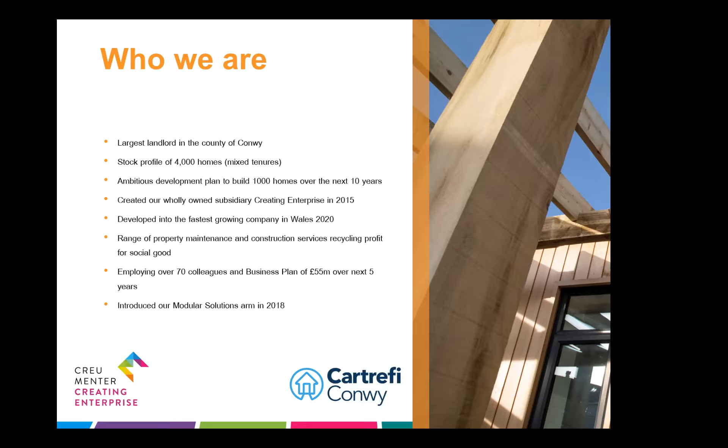Just a little bit about who we are. For those of you who have not heard of Cartrefi or Creating Enterprise, we are the largest landlord in the county of Conwy. We have a stock profile of circa 4,000 homes, mixed tenure, and we have a very ambitious development plan.

As do many social landlords now across Wales, we aim to build about 1,000 homes over the next 10 years. Creating Enterprise is the wholly owned subsidiary of Cartrefi, and it's been a huge success to date. We created the company in 2015, and we're very proud to state that just last year, through the Fast Growth 50 Awards, we're officially now the fastest growing company out of any sector in the whole of Wales, providing a range of property maintenance and construction services.

Not just to Cartrefi Conwy, but to various other sectors, recycling the surpluses we make for social good. The social good we really emphasize and try to drive forward is creating work opportunities for those furthest from the job market. We're now employing over 70 colleagues within the business, with an order book of over £55 million worth of work just over the next 5 years.

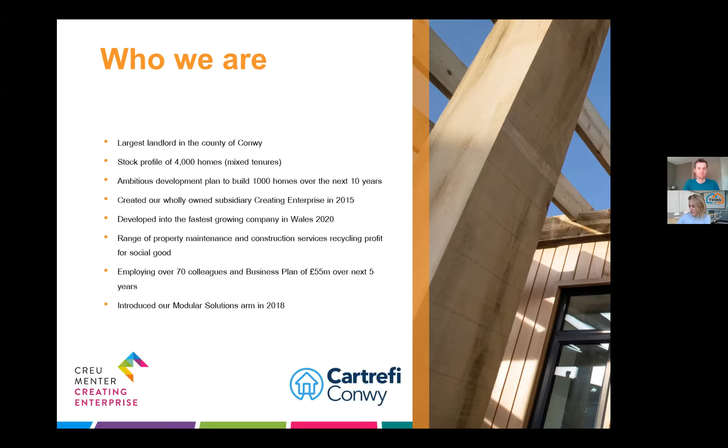And we introduced our modular solutions arm in 2018, which I want to discuss and present to you today. So Creating Enterprise Modular Solutions, what is this?

In effect, it's a partnership agreement we have with Beattie Passive Build System. We have the exclusive license to build this system across North Wales. So we have bought into a license, but the whole purpose is a self-build model. We employ local labour. We've upskilled our own colleagues within Cartrefi Conwy Creating Enterprise, but also give opportunities for tenants to come into the business on paid employment to build these homes moving forward.

So in effect, why did we build this product? Well, it is within Welsh Government's ambitions to build zero carbon homes, exactly what this product gives us. But it's also Cartrefi Conwy's aim to not only build quality homes which are cheap to run thereafter for our tenants, but also to utilise tenants to build these homes. That is our vision, and that's what we are already achieving and want to continue to strive forward to achieve over the coming years.

So, real super energy efficient homes, reducing costs, very healthy homes to live in, and what we do like about the product as well, we do see these as real lifetime homes. There's no load bearing walls within the home, so in terms of development quality requirements or homes that can be fully adaptable moving forward, we've got the solution here.

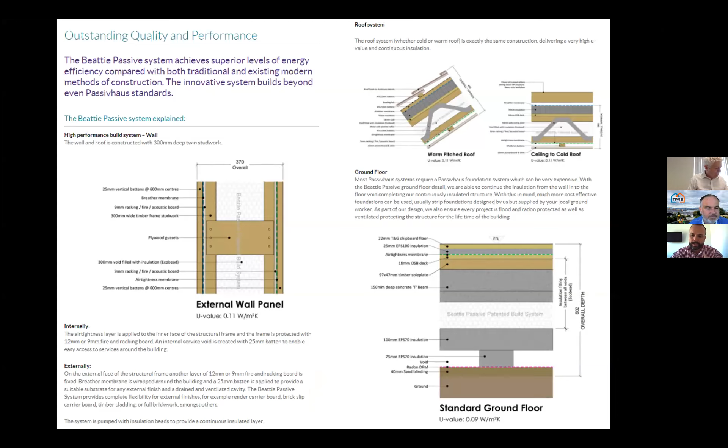I've got a couple of slides here which I'm not going to go through in all the detail, but if anyone wants a copy of this presentation thereafter, I know it'll be widely available. What I have put in is some of the technical aspects of the build, which is all here in black and white, but really my focus today is just to give a general overview of Creating Enterprise and why we're building this property, who we're trying to house within this property, and the fact that it really is aimed at our tenants of Cartrefi Conwy to not only build the product, but then to live very comfortably in these properties thereafter.

So these are part of the presentation pack. As I said, I'm not going to go through it all in detail, but it's there for anyone who wishes to see the technical specifications thereafter.

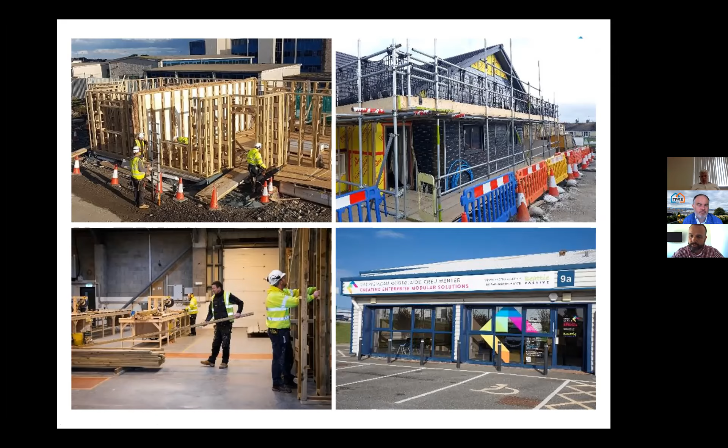Our factory for the first 18 months was based in Anglesey, in Holyhead. On the bottom right here you can see the unit we were working from. We're actually going to be relocating more to central North Wales in the coming weeks, operating out of Rhyl but also serving the whole North Wales community. In essence, it's a timber frame product built to passive house standard, a very high energy efficient standard in house building.

Another scheme we've recently completed, with a short video clip I'd like to share, is the Sefton Road scheme in Old Colwyn. This is a scheme developed alongside our local authority, Conwy County Borough Council, developing 8 one-bed units for homeless accommodation. This has now been completed, and all residents and tenants are living in these units - it's been a huge success. This was an old garage site which we knocked down and built these 8 units for much-needed accommodation in the Old Colwyn area.

I'd like to now, if it all works - and here we go. This is the 'never mind building homes' moment, I think this is the hard bit, getting a video to work. It's only 3 minutes long, bear with me for the first 10-15 seconds. The sound's not great, but I can assure you it does kick in.

This video explains, from our lead trade Bryn Jones who looks after our modular team, the background of this project. It was filmed at the back end of last year, showing the property being built, and I'm pleased to say these are now all built and we've got tenants living in them. I'm just going to share this now with you all.

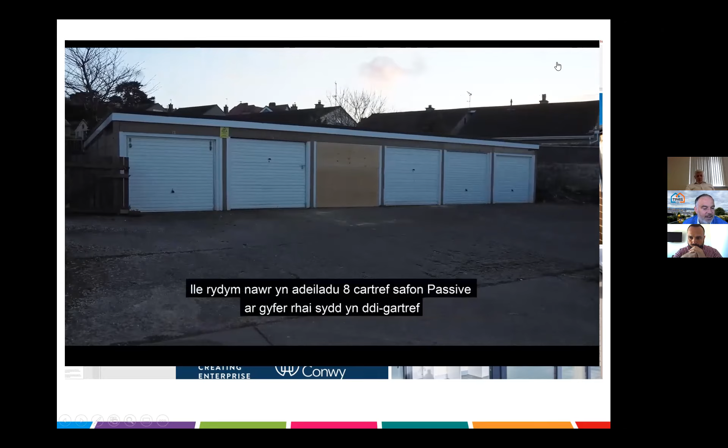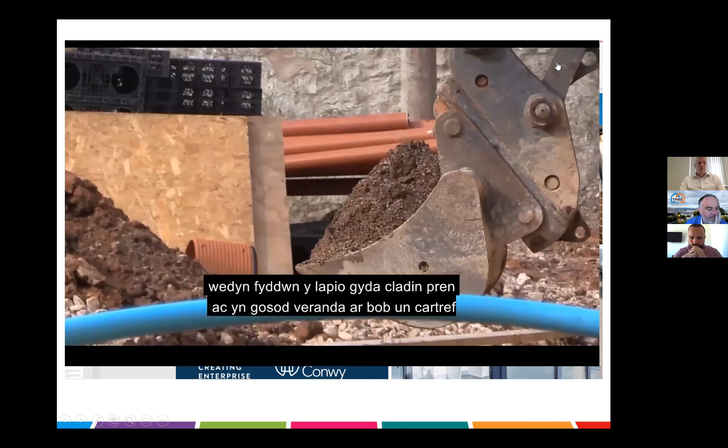Hi, I'm Bryn Jones, Lead Trade Technician for Creating Enterprise Modular Solutions. Here we are at Sefton Road, Old Colwyn, where it used to be an old garage site, and we're now building 8 passive standard homes for the homeless. As you can see, this is work in progress, due to complete in November this year. We're currently completing utilities and groundworks outside, then we'll be wrapping the home in timber cladding and building verandas on the front of each home.

The benefits of living in one of these Beattie Passive homes is the energy efficiency. This home will cost about £40 a year to heat, with triple glazed, airtight windows, 0.11 value in the wall and 0.09 in the floor. That gives you a house that heats for about £40 a year.

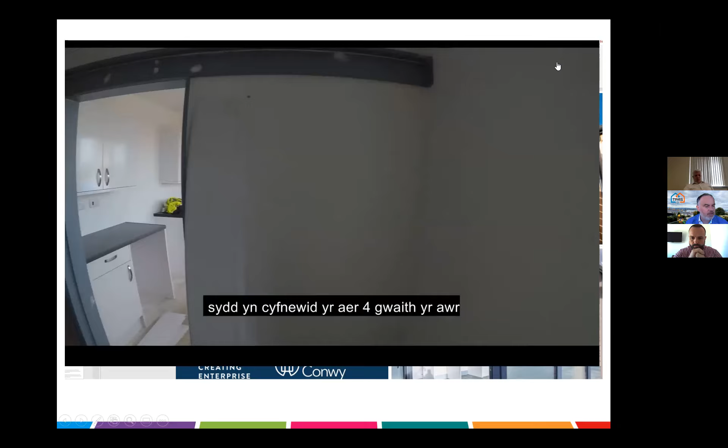It comes with an MVHR system in the cupboard which exchanges the air 4 times an hour, puts the air through 3 filters - dust, pollen and pollution - giving a clean air environment to live in. It helps people with respiratory illnesses and asthma.

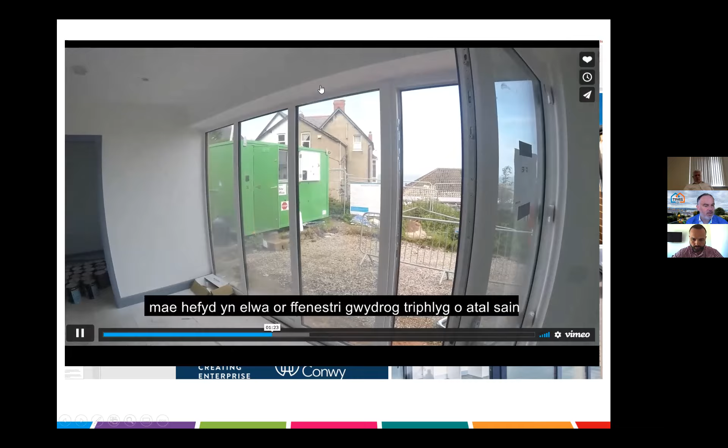It also comes with the benefits of triple glazing for sound deadening, so what you hear outside does not come inside, giving you a nice quiet area to live in. Even if you're next to a busy road or train station, the noise does not travel in through the walls.

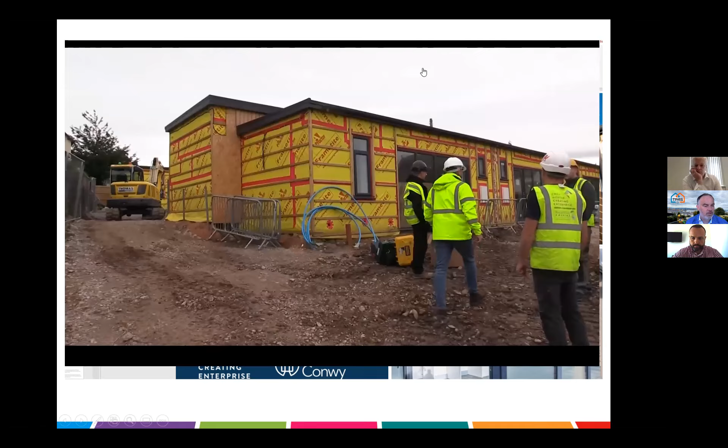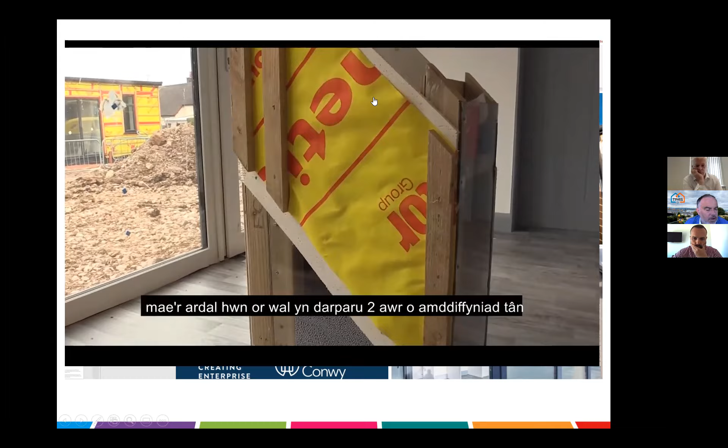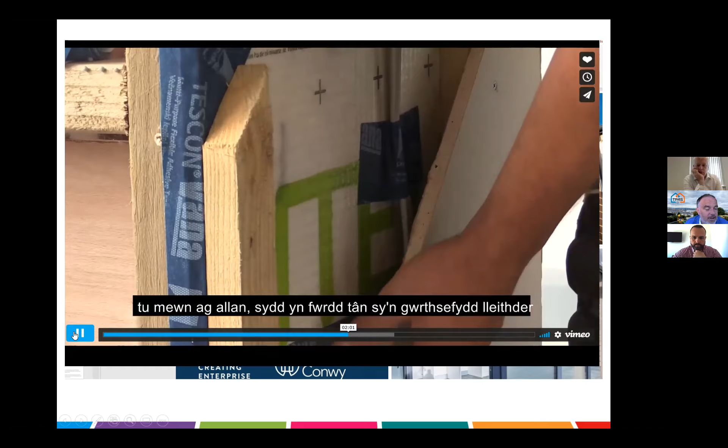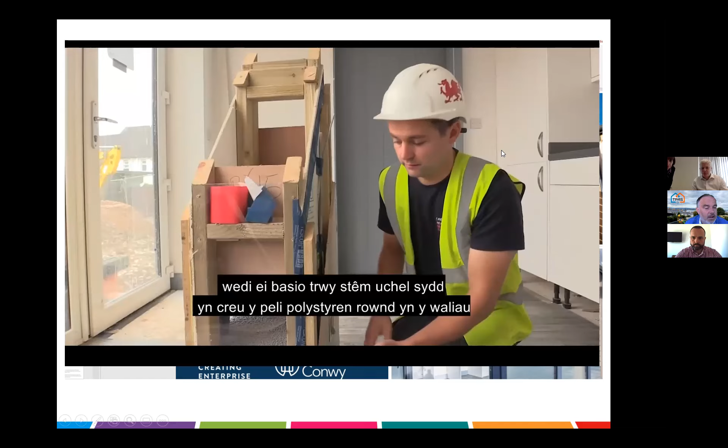This is gained by using white wall boards inside and outside, which is a moisture resistant fireboard. Once the boards are on internally and externally, we then drill holes and pump in the EcoBead, a high energy efficiency material created from old oil passed through high steam, which creates the polystyrene balls that we inject into the walls.

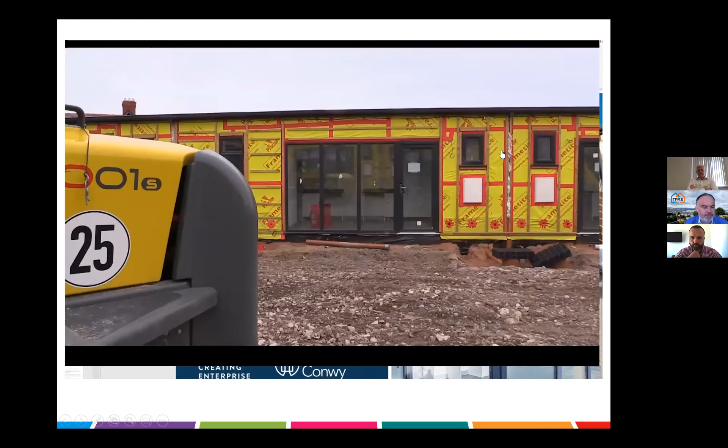As you can see, it's a very spacious 1-bedroom home with a bathroom behind me, a very spacious kitchen, and a very spacious bedroom behind you there.

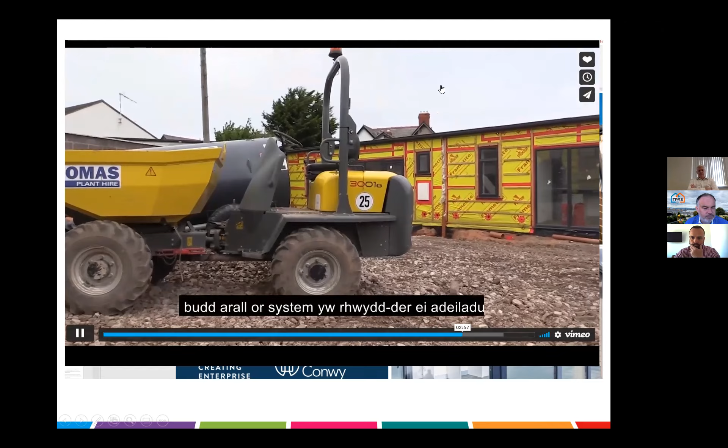Another benefit of the system is the ease of construction. We give an opportunity to local unemployed people to come in and gain life experience and work experience erecting these properties. We are currently employing 4 trainees from the Anglesey area where we've been building other houses, and it opens an opportunity for any people from any area who are unemployed to gain the life skills required, and hopefully one day become part of our team.

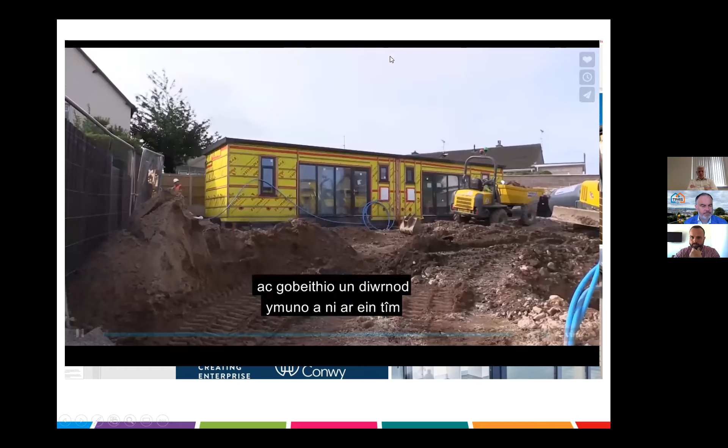Okay, thank you. Hopefully you're able to hear that. Okay, so here we go, push it. How I get out of this now, I do not know. Can you hear me, David, again? Yep, I can hear you fine. You need to just stop sharing, that's all. Yeah, okay.

Thank you. So yeah, I'm pleased to say, from the 4 trainees we had there, we've now employed one of them full time into the business, which is great news for us and great news for that previously unemployed tenant, who is now working within the team and an integral part of it, where we've got a large order book building these homes moving forward.

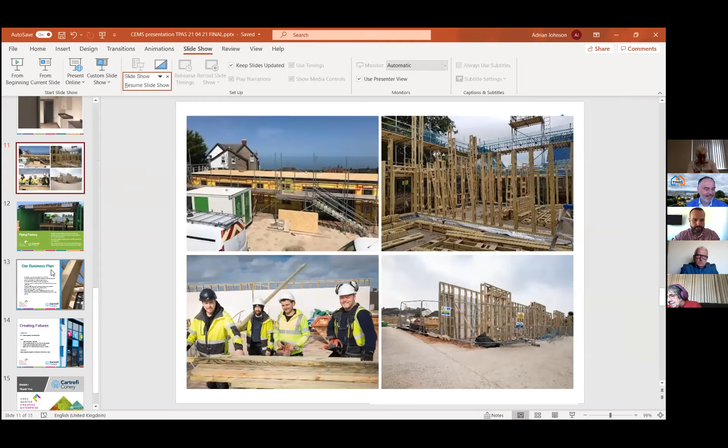So I'm just coming to the end of the presentation now. Just bear with me. I just want to end really on the business plan itself. It keeps wanting to go back to this video. Apologies, I'll have to just talk you through this. I don't know why it's going back to that one.

Apologies for that. But the business plan moving forward is predicated on employing local people and being able to sell this product to the North Wales market, to housing associations, local authorities and private developers as well. We're pleased to say we've already built 25 of these homes, with the intention and an order book in place to build another 100 homes this year. We have a business plan provision to build 350 of these homes over the next 5 years. So not just building these quality homes for people in need, but also the amount of jobs we can create in the near future. I think it's quite an exciting opportunity, not just for us, but for tenants of Cartrefi Conwy as well.

So I'm conscious of time, I could go on a long time about this. I'm quite passionate about it, and I think it's something we're very proud of. It's great that we've got our board member Bill Hunt here today, casting an eye over myself and being able to really promote this from TPAS perspective as well. I think it's fantastic. And from that perspective, David, Elizabeth, I'll conclude my presentation. Apologies why it wouldn't go back. I'm not the best on IT at times, but I'll conclude the presentation and take any questions.

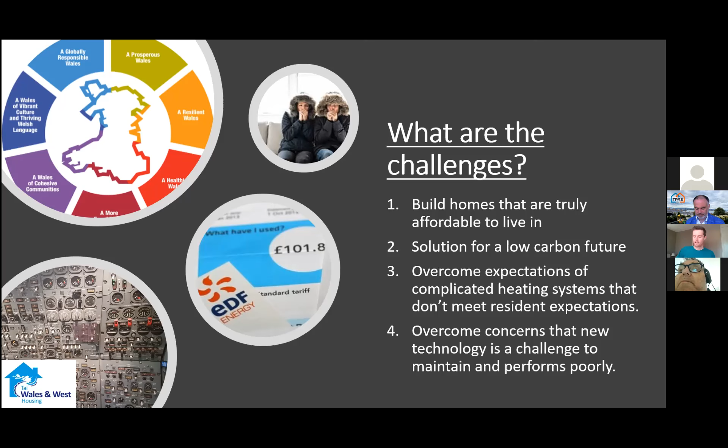Why do we like it? To be more specific, there was lots of PV on the roof, providing lots of free electricity generation that residents can use. But also putting in a battery system - a large battery that can take that free energy from the roof and put it into the house so residents can use it whenever they want, not just when the sun is shining. So it's really handy to bring down those fuel bills and electricity bills, and it's also good for the environment.

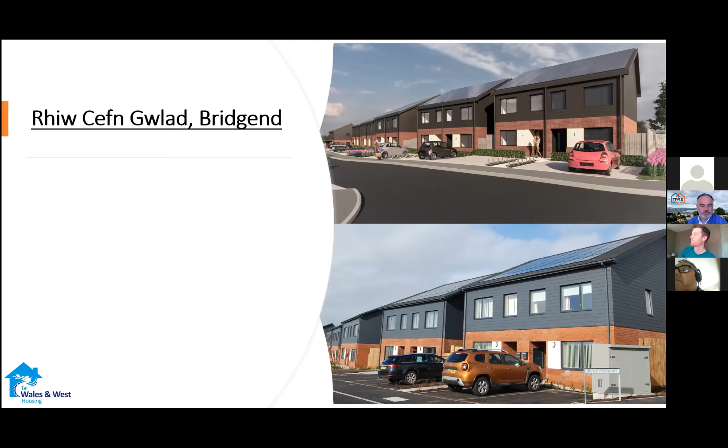I'll come onto more of the detail just later. But I'll run through - so these, we built 4 one-bedroom flats here.

We did this with a range of different types of property, just so we could get an idea of exactly what suits the needs of the local authority, but also to push that concept to make sure we can do this across a number of different housing types. So the flats we've got are well proportioned - they're 52 square meters, which is higher than our usual minimum standard.

I think Cadogan's gonna kill me on this. Cadogan's here - hi Cadogan. I think it's 48, 45 square meters for a 1-bed flat. He can tell us later - he's better at this job than I am.

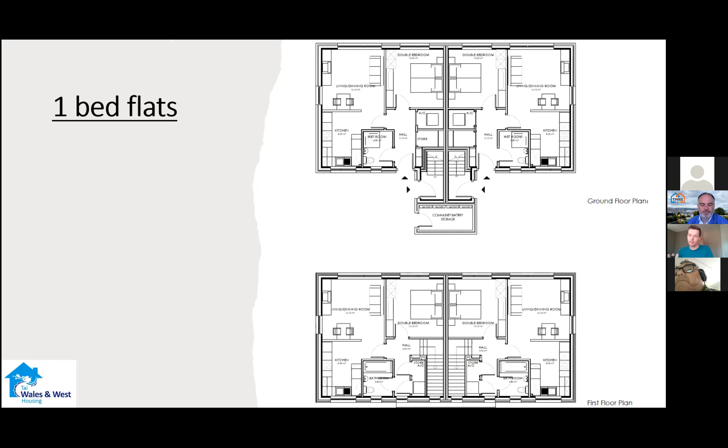So it was a bit larger, and the reason for that was the heating system we're using - it's not just a boiler on the wall, this thing's the size of a fridge freezer. It's quite large, so we need to get around it and find a store for it. It's actually increased the square meterage a little bit as a result, by about 10%, which has increased our total construction costs. But again, something for discussion.

We got some 2-beds - we built 8 two-bedroom houses here. Again, well proportioned, we've been thinking about the residents. These ones are 89 square meters - larger again to allow for the battery storage for the heating system.

On these, we've come up with a way of allowing an easier conversion of the loft. We know people want to stay in these properties, join a community and stay in a community, not have to move because their family size increases. So within these properties we've created a warm roof, which means we can convert the loft much more cost effectively than normal, so these can be converted into a 3-bedroom should they be needed in the future. We might come onto that later.

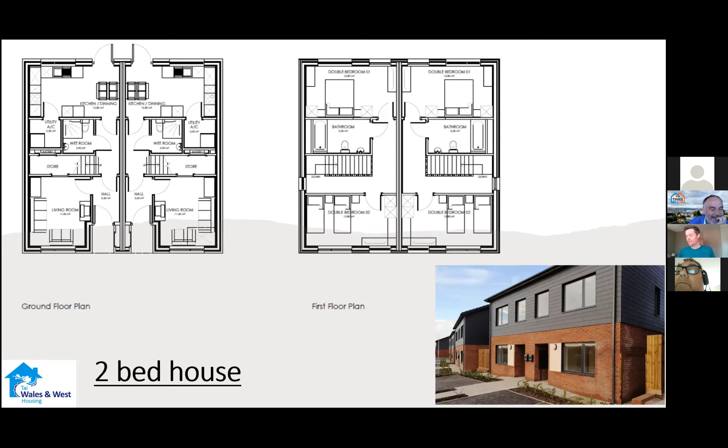4 beds - we didn't build any 3 beds, we built 2 four-beds, and these are 120 square meters. So again, suitable for families, suitable for multiple particular needs. All of these are lifetime home standards - they've all got ground floor wet rooms and a first floor bathroom. So very light and well sized for a modern family.

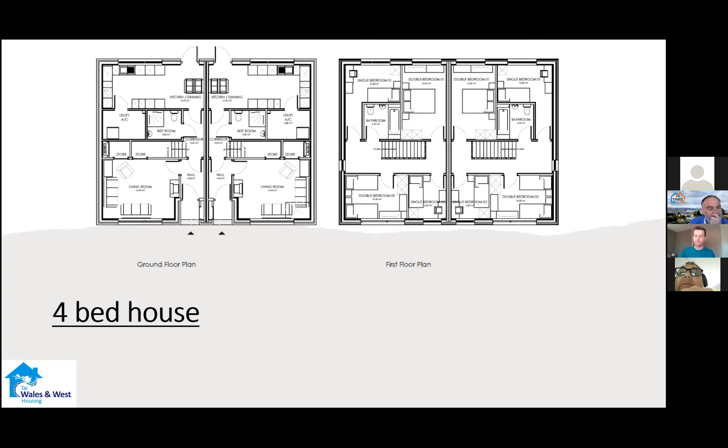So those challenges I was talking about - the first one was about making sure they're truly affordable. So energy bills - how are we cutting down energy bills? Like I said, we're reducing energy demands by making it super insulated and really airtight. We were talking about passive standards in the last slideshow, and we didn't meet those - they're really, really tough to meet. We tried to get there, but we couldn't.

So the minimum building regulations state you have to have a quantity of, let's call it, 10 air changes an hour for a property. To get good practice is 5. To get passive standards, it's 0.6. We managed to get below 2 on these ones - just to put it in context. So air quality is really important - if you start getting to below those standards, you have to be putting in mechanical ventilation to keep that airflow going, because otherwise you end up with pollutants and a poor environment internally.

And that's part of our heating system - it's actually taking the air from hotter areas, recycling it and putting it into other areas. On this scheme we've got no radiators - we've got a blown air heating system that recycles that warm air, using an air source heat pump solution - so an air-to-air solution. Some air source heat pumps you've previously seen have probably had radiators or underfloor heating where it's gone from air to water, converting energy from air into water that then circulates around. So this is air-to-air.

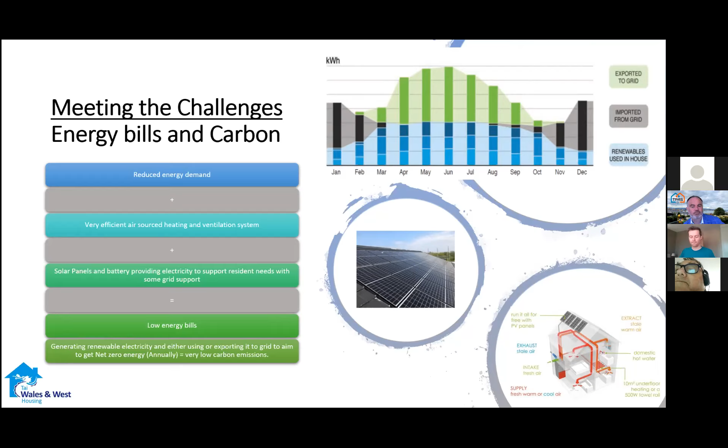They're easy to use - the properties are really easy to use, and it's really important that we do that. We've provided user manuals, how-to-use guides, and video guides, all on our website. The control panels we used are really simple, and they're adjustable for the residents' demands. We'll come on to that later.

The technology we put in ensures we can remotely monitor, so our maintenance teams can check to see whether things are working as they should remotely, without having to wait on a call from a resident. This means we can keep an eye on the heating systems and everything without calls coming through that then become an emergency to fix. I think that's a great system we've got there. During the design and construction phases, we made sure we engaged with our maintenance teams so they learned as we went how these were built, especially the heating systems.

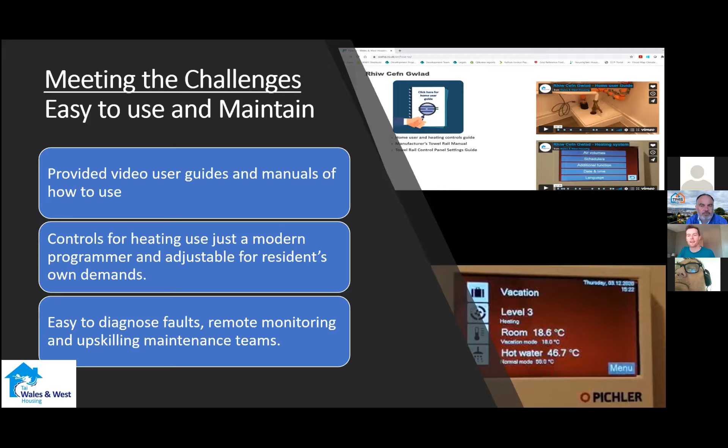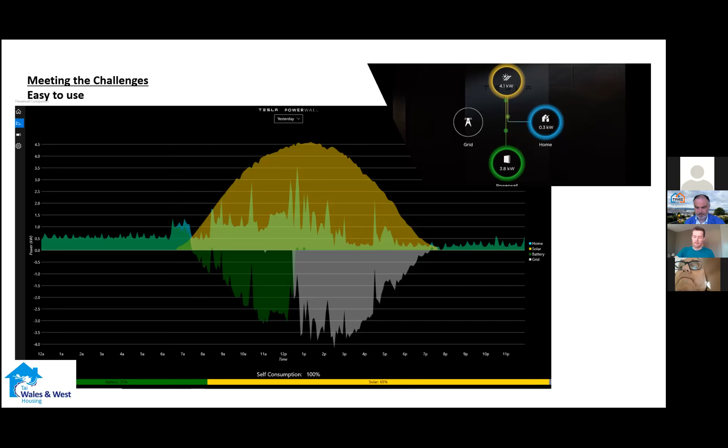So the next steps. We started in 2019, we completed in January 2021, so we're three or four months into this now. We're continuing to monitor these over the next year at least to see how they're performing, talking to residents as we will in a minute.

We have the technology, we have the capabilities of doing this. It's just what we do in the future and how we fund it without the IHP funding that we had before. I suppose that's the only query.

So my total build cost for this scheme, we're very open with what we've got here. It's 3.4 million for 14 properties. It was £2,900 a square metre. Usually we build things for around £1,800 to £2,000 a square metre. The total cost for innovation for the properties roughly was about £60,000 to £70,000 a property. So just to put that in perspective, I don't care about money, but sometimes you have to worry about money.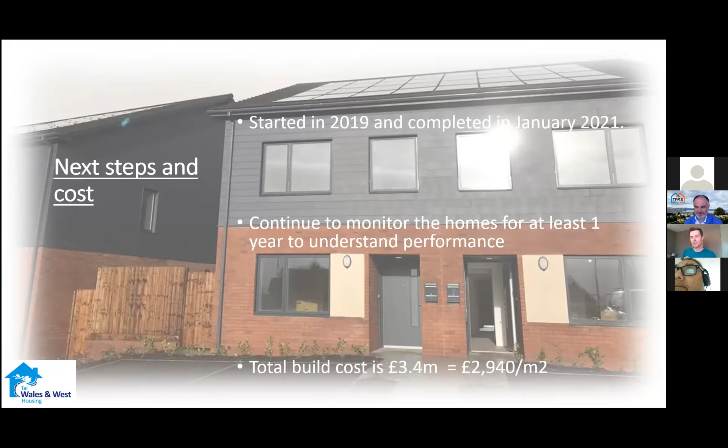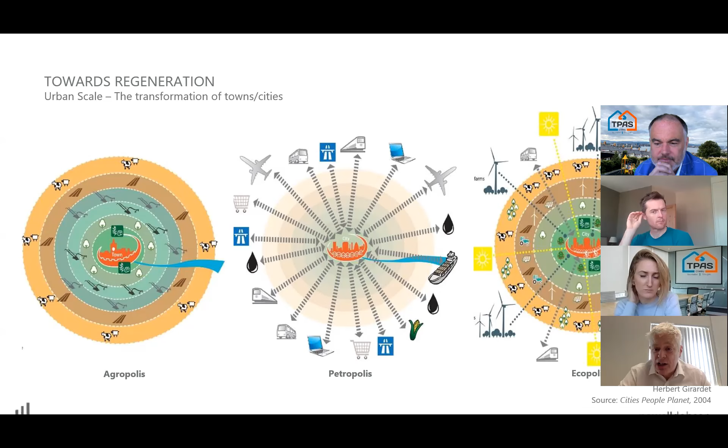There are issues we're going to have to address on transportation, planes and what have you. These are significant challenges, and one hopes that those sectors are taking it seriously and are going to look into transportation. To my mind, that's probably the biggest challenge we face, because there's a lot of technology there for homes and heating, and I think we need to step it up. But transportation is probably the challenge that perplexes me more than most.

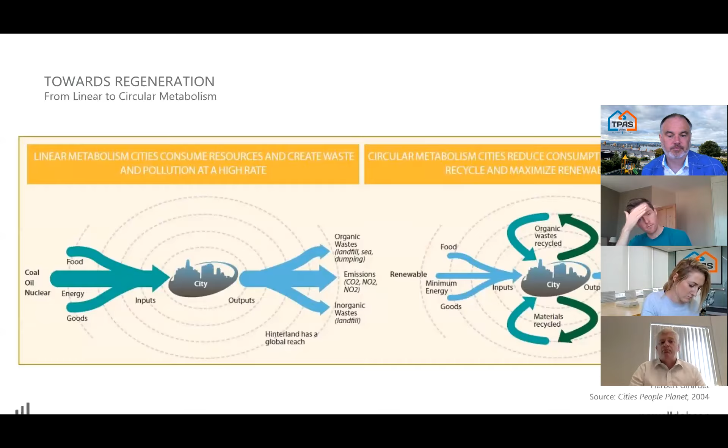So if we go to the next slide, it shows how cities are now. To the left, you'll see resource coming in, food, energy, goods coming into the city, and the outputs seemingly leave. That's pretty much the model we have at present.

So we have organic waste going to landfill, sea dumping, etc. We've got the emissions, we've got inorganic waste to landfill, etc. This can go a long way away from the source of generation, and it creates significant issues. We have begun addressing it, but we've got a long way to go.

The perfect scenario is the one on the right of the image, which shows these renewable energy sources coming in, food coming in, goods coming in, which are then recirculated and reutilized.

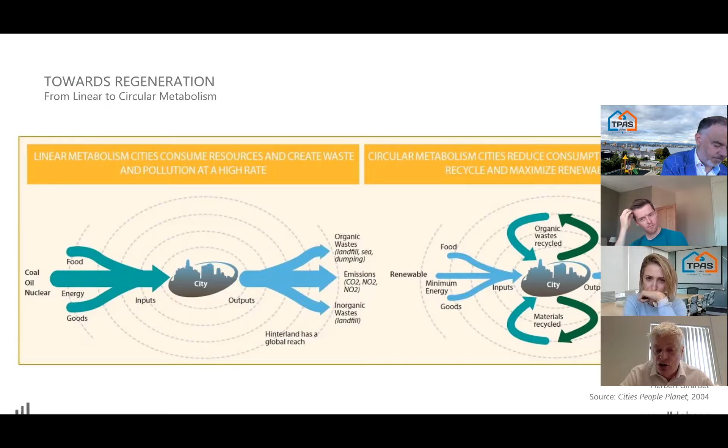There are many technologies. I'm particularly interested at present in the field of biodigestion and anaerobic digestion. I think that's got a big role to play, and we need to investigate it on a far higher level. By reutilizing waste, it removes the amount we put into landfill, the amount of pollution, etc. It is possible. There are technologies out there which have been used in certain contexts that we don't always appreciate, which can be used for human context on a more human scale and level.

So there's still movement of waste to outside of those environments. That needs to be further worked upon, but that has to be the aspiration. We've got to remove this constant throughput of in, out, and somebody else's problem.

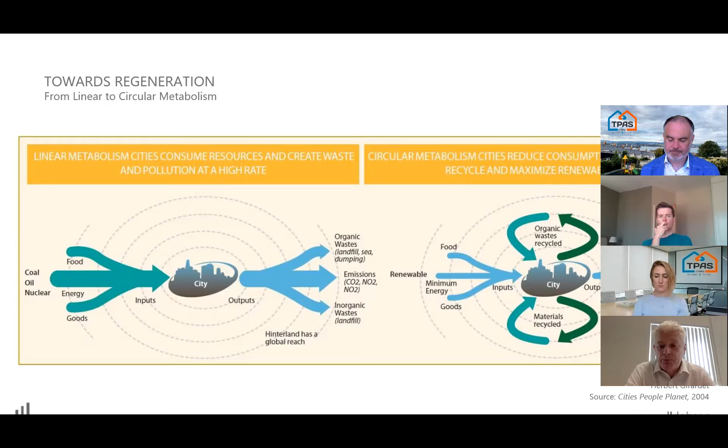I've spoken a lot about that, I know. So, okay, so next one.

Okay, and this is Biophilic Swansea. This is the scheme. As you can see, it involves a roof garden and roofscape with 50 residential apartments. We're working very closely with Pobl, Wales' largest social housing provider, in providing affordable homes and shared ownership homes. The ambition is to get people into the scheme who have an interest in this kind of way of living in this sort of context.

You can see to the rear there's a large 13-story tower. The building also shares use with commercial floor space, which is office use, so there's 40,000 square feet of office, and that balance will become more evident as the presentation moves on. We've got a small amount of retail on the ground floor, and to the rear of the tower we've got an exhibition and education space, which I think is really important, where we can display how this building works.

There will be a lot of display systems showing the energy use of the building as a whole. We'll also integrate an aquaponics system, which is probably a first in a residential scheme. Aquaponics, where we grow fish, which then provide the nutrients for growing plants and foodstuffs in the glass houses.

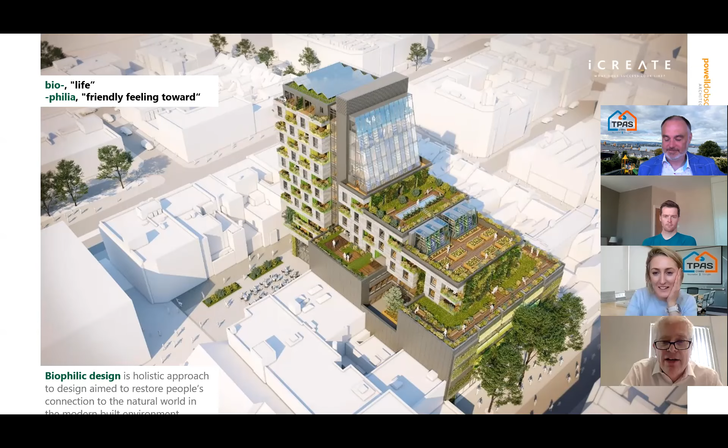So if we move on. Okay, so creation of a sustainable community. I want to move on from there.

So building-wise, if you know Swansea at all, you'll see the market as the big shiny roof. If you can see that just to the right of the circle of red dots, that gives you some kind of bearing.

Our building then, if you carry on to the next screen, is literally about 100 yards away from there. If you've ever been to Swansea Market, if you're like me, it's one of the must visits whenever you come to Swansea.

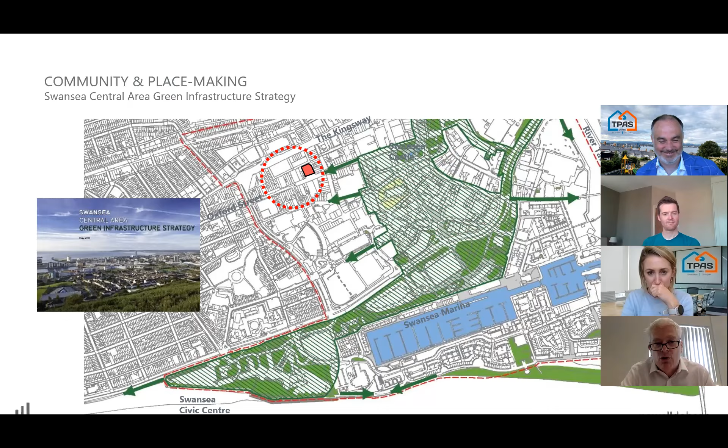Moving on, you can see the roofscapes. There's a lot of green, a lot of flat roofs in Swansea. So there is the potential to roll out more greenery. Obviously there are issues involved - we're working on a potential other scheme which we're hoping to replicate this kind of model on. But subject to ownerships, there's the potential to look at using our flat roof spaces for more schemes. Instead of them just being there, let's look at utilising them.

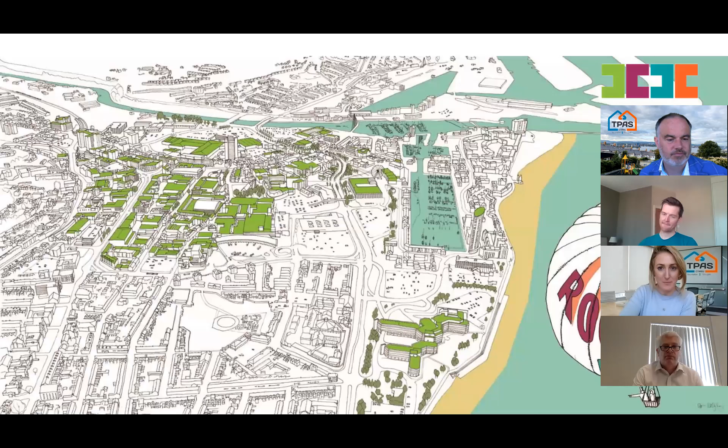Again, that's another angle of the rooftops. So moving on, there we are.

So there's the building - you might recognise it if you've been to Poundland, or if you know Swansea well. Located in the heart of the regeneration scheme, there's also nearby the local authority, who we work closely with, developing a large tech hub. So we're hoping to create, when both projects are finished, a great place which people hopefully will enjoy being in, and where community is strengthened.

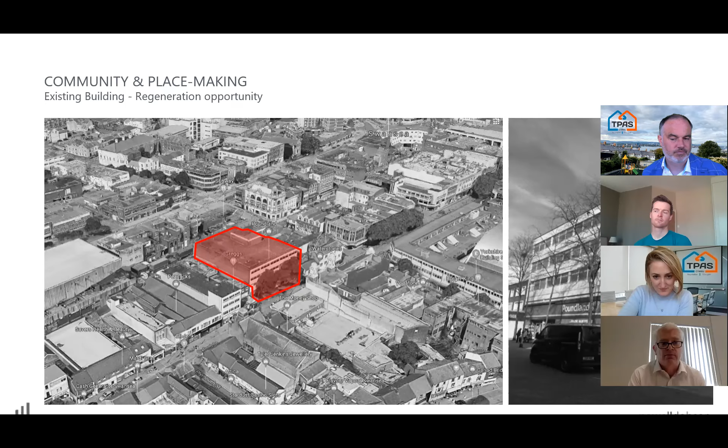That's the regional framework plan showing our building in relation to it, and there you can see the building in outline.

If we move on, you can see where the new tower gets built and its context and relationship to the digital village, which is the one I mentioned being built and developed by the City and County of Swansea. So again, working closely with them to develop this.

Collaboration is a big thing on this project. We've worked fantastically with our partners - Pobl, the local authority, Welsh Government. If there's a will to do stuff together, then nobody can be stopped, and that's something that's really been heartening in this project - the desire to get collaboration working positively.

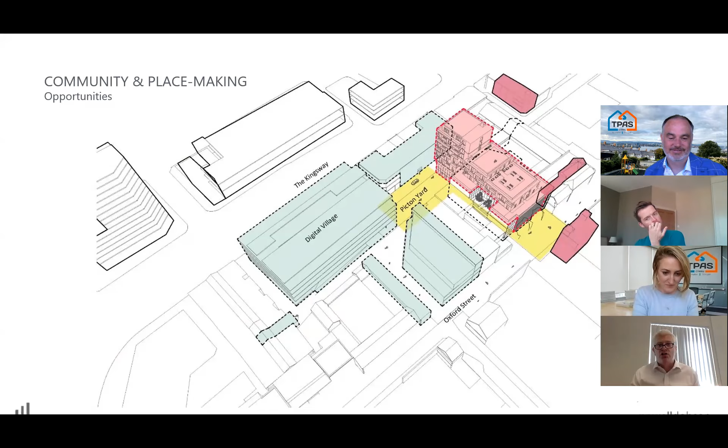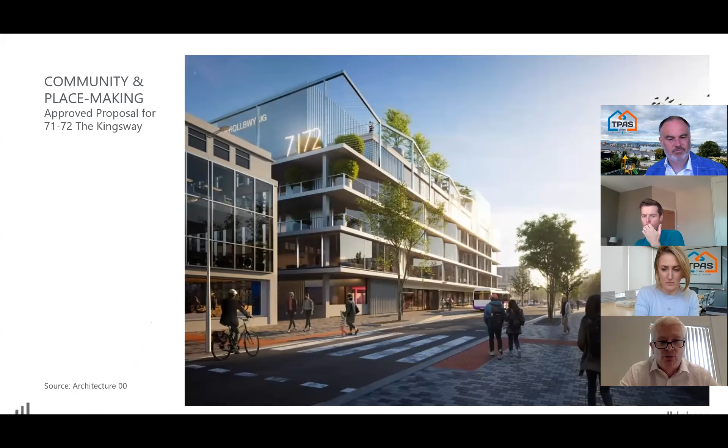Carwyn, sorry to interrupt you again - these are absolutely wonderful. I'm just wondering if we could share these slides with the delegates afterwards so they can have a go through them, just so we get an opportunity to ask questions. I'm aware Adrian's got to leave in 5 minutes.

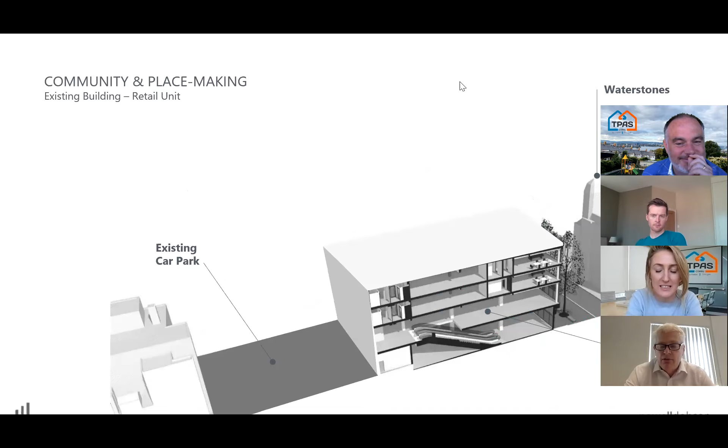Yeah, that's fine. Okay, there's the existing building - that's a cross section of the existing building. You can see the scale and the mass of what we're doing. This is a 3D model of it, so you can see there's going to be some exceptional views from there.

You'll see the large glass house that runs up from behind the core - that's 4 floors of glass housing, with integrated solar PVs given it faces south. There'll be the potential for an aquaponics system to provide the irrigation and nutrient system for growing plants. We're looking at higher quality plants to be grown in there, so again, huge involvement for occupants in getting involved in this as a community project.

Thank you so much, that is an absolutely incredible project, something that I've had a look at a few times, and I'm really excited about it. I think there's so many benefits, and just so much innovation as well.

So thank you so much, Carwyn, for that. I just want to put the questions out there to the panel. We've had a couple of questions in already from Amanda, who's asking if you can utilize the office space, do you have plans to increase the housing aspect?

Yeah, I think this is a big question, actually, isn't it? Pretty much. It's a mixed use scheme, and the mixed use nature is a part of the concept. So it's really important now we get this mix of uses. We've got the residential, we've got the commercial. One point which I've forgotten to mention, my most favoured part of the project, is the fact that carbon from the office users is being extracted and fed into the glass houses.